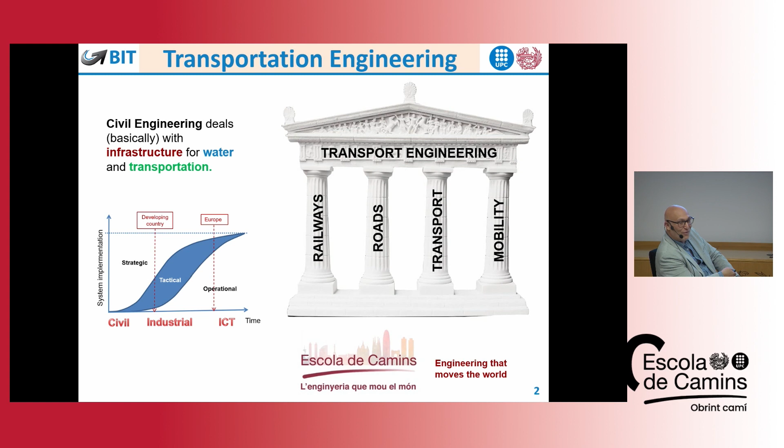As you can see with this lemma of the civil engineering school, they always use moving - it's always transportation related. Okay, let's talk a little bit about railways.

Railways. Well, basically the team is reduced, because they only had one subject at the beginning. I remember coming to the school on Saturday mornings - this professor, Andrés López Pita, was the only professor, one of the earliest professors we had in our school. He's been a professor since 1983, and he's retired now - retired some years ago. I remember coming on Saturday mornings, and the time was variable because he was coming from Madrid, and at that time the air shuttle Madrid-Barcelona was not very punctual.

Imagine the class was at 12 - well, today it was at 12, tomorrow at 12:45, depending on when he was arriving. Now people, the students, would leave. But at that time we were thinking, this guy is coming from Madrid just to give us one class of an hour or an hour and a half. It's a big sacrifice, a big personal sacrifice. It's not 15 minutes - he's spending a whole day just to teach us. So we were paying a lot of attention.

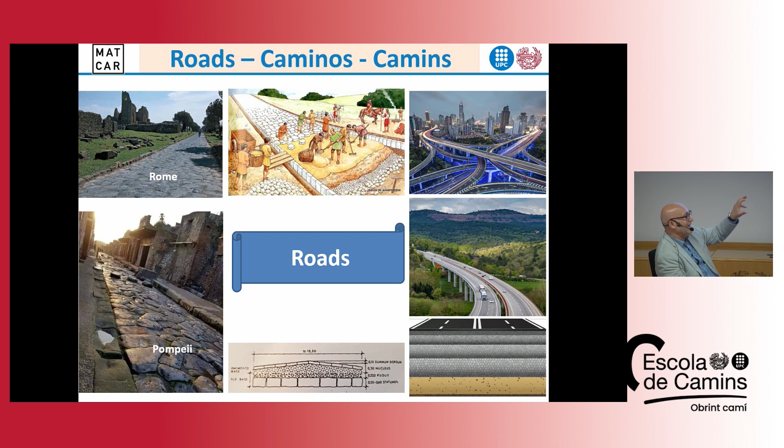Okay, roads. This was prepared by the roads team, but they're all watching an exam right now, so they can't be here. This was from the early days, the early years. Some people passed away already.

Joan Comte Guinovart, passed away, the first an expert about roads, and then this guy brought two young people, young engineers, José Vicente Solano and José María Alonso Viarge. I remember one of the subjects by José María Alonso Viarge. I didn't take it, but there was this kind of legend that the students talked about, about what this guy was talking about.

This is before computers. We are in the 70s, and this guy was talking about roads, the layout of roads as a swath, using differential varieties, Frenet trihedron and these kind of things, everything mathematical.

Then we had Juan Antonio Fernández del Campo, also passed away. He was coming from Madrid, and we used to call him the minister, because he was talking really like a minister, with a very nice suit. I remember the first class: well, the cities are not meant for cars. Something obvious, but he was making it really. And then Pablo Novell, also passed away. He was teaching road layout.

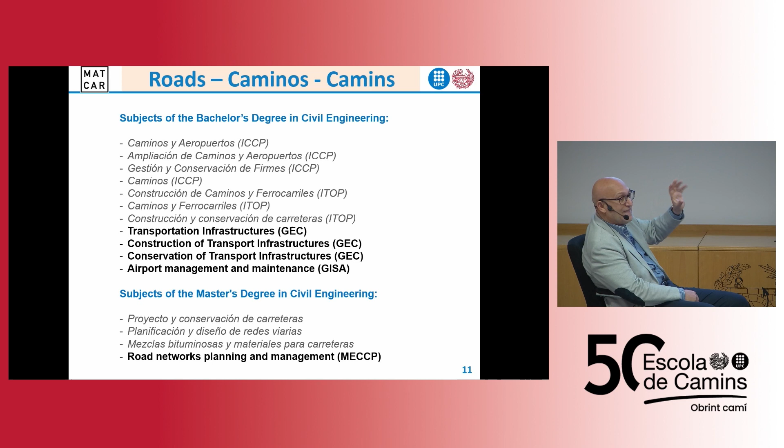They had several names, and the ones in bold are the current ones: transportation infrastructures, construction of transport infrastructures, conservation, airport management and maintenance, and road networks planning and management. Some of them are shared with the railway engineering guys.

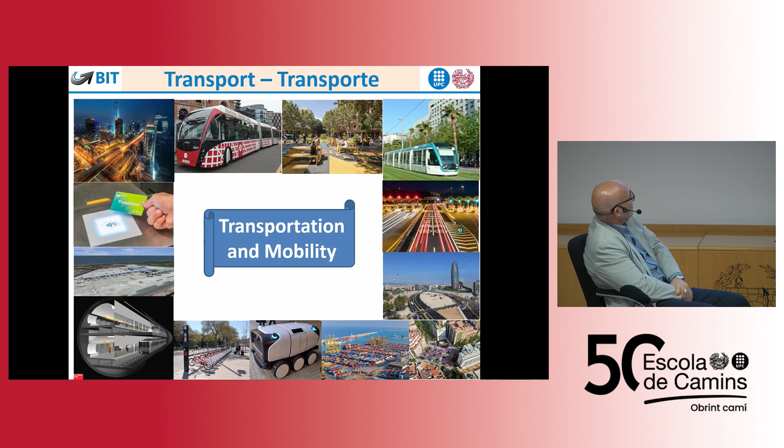And last is our team, the Barcelona Innovative Transportation Group. I'm going to talk about transportation and mobility, and pretty soon you will see that Jaume Barceló played a key role in this. The early days, late 70s. Professor Juan Domingo Cox, he died. But the first professor I had was Mateu Turró, the first professor with an international background. He got a master's in Michigan, at Ann Arbor, and then finished a PhD thesis here in Barcelona. But pretty soon he went to the European Investment Bank.

And then he called me and said, you need to finish the PhD thesis. That was in 1988, in May. When are you finishing? I said, at the end of the year. No, you need to finish before, because you need to be here at the beginning of September to teach the classes, because I'm going to the European Investment Bank. So you can imagine. And with me, I had the opportunity to get master's degrees and PhD at UC Berkeley, so we had some international standards about research, also the first publications in scientific journals in transportation.

Some years later, I was teaching not 20%, but 100% more than what I should teach, because I never had somebody helping. At the end, I said, I'm not going to teach the key subjects until we solve this. Of course, I talked to the director of the school, Antonio Aguado, first. And this was solved in one month. It went to the cloister of UPC, the rector said solve it. I had the promise that pretty soon we were going to hire somebody, and here comes Magín Campos, who came from Santander. Thank you, Magín, for this big leap.

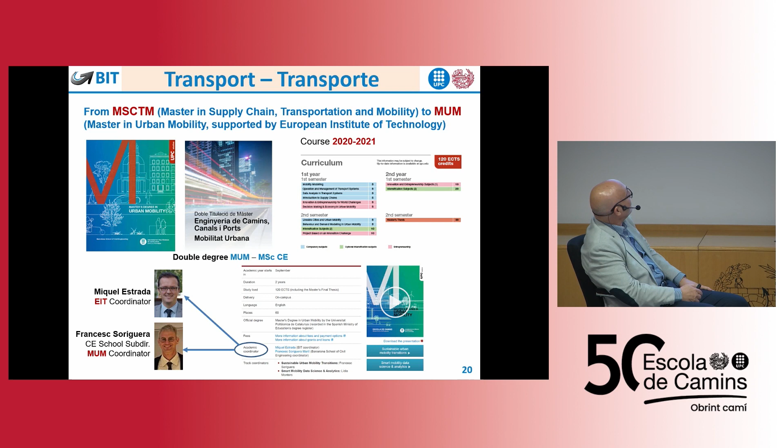Well, we have many subjects, from one in the 70s, economics and coordination of transportation. All the subjects in Spain that were not related to infrastructures had this name. And the people were related to railways, in Madrid and Valencia, everybody was related to railways. And then in the new plan of 1978, we had 2 subjects, but only 4 people of this specialty of transportation planning and transportation economics, and now we have a bunch of subjects.

This is our team today. We are these 7 full-time doctors, 2 professors, myself and Miquel Estrada, who is on a trip right now, but he became a full professor. Francesc Soriguera and Manel Grifoll are associate professors, but pretty soon they'll become full professors. And then José Magín Campos, Hugo Badia, and Margarita Martinez.

And then we have a bunch of collaborators, part-time, some of them with a PhD thesis, some of them have been PhD students of some of us, like Enrique Jiménez, Marcos Medina, and some of them are doing the PhD thesis right now, like Clement Lemardelais. Projects, lunches, we have a lot of fun.

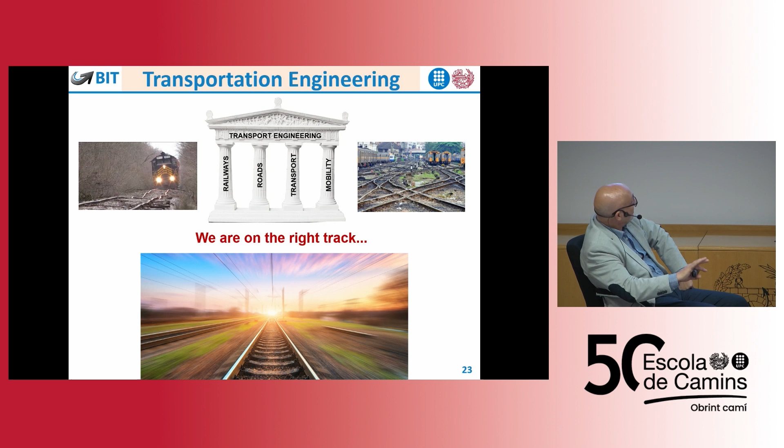And this is it. I think, I don't know, but I think as a group of all the transportation engineering, railways maybe need a little bit of this kind of renewal of people. We have the people, but they just started. Roads and transportation, I think we are on the right track. So thank you very much.

And now it's time to present Jaume Barceló. As I told you, he's a physicist. He's got a PhD in physical science. And he became professor of the Department of Statistics and Operations Research here at the Technical University of Catalonia. He is Professor Emeritus since 2014. He has been several things. He has been the scientific director of the transport and ICT projects at the InLab of the computer science faculty. He has been teaching in the computer science faculty and also in the mathematics and statistics faculty.

He became also the director of CARNET during a couple of years, 2015, 2016. And I remember he invited me to teach a lecture, and then I said, well, I don't think they're going to like it. And then he said, well, no, it's okay, it's okay. And after the lecture, they never invited me again.

He's author of more than 140 papers, and he got several awards, like the Narcís Monturiol Medal of the Regional Government of Catalonia, the Traffic Simulation Lifetime Achievement of the Transportation Research Board. He spent 3 years as a strategic advisor of the PTV group on transport models, but probably his best achievement with his team was to develop this reference micro-simulator AIMSUN.

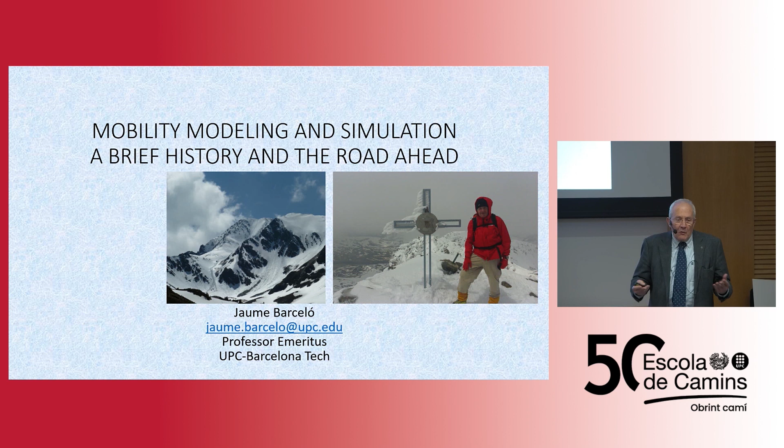But currently, there is a trend to present these achievements only in personal terms: I am who had conquered the mountain. But to explore an unknown territory, like the modeling territory was 50 years ago, we have to bear in mind the time perspective; it was just exploring something unknown. And this is not work that is done by a person, but by a team. It's only the joint effort of the team that allows you to reach the summit.

Yes, I'm going to talk about modeling, but before entering into the modeling details, let me make some reflections about what models are, the purpose of the model, and the use of models. First of all, I would like to highlight that a model is not the reality. The reality for me will be, in general, a system, and in this context, a transportation or traffic system. A model is only a formal representation, and I highlight this term formal, because it means we use very well-established rules and terms in a formal description of something. It's a formal representation of this reality.

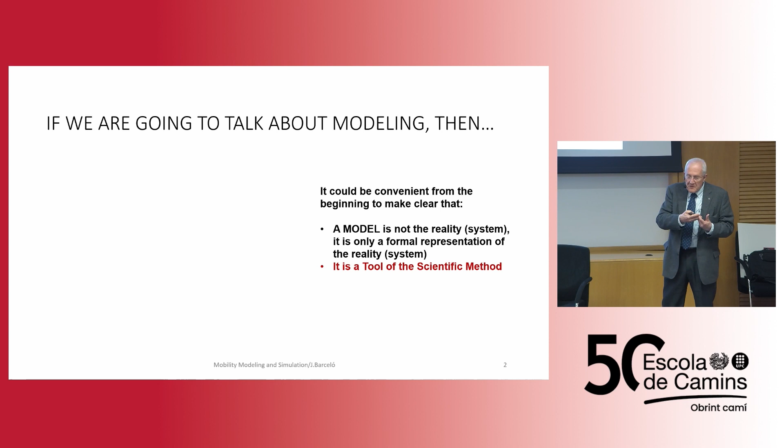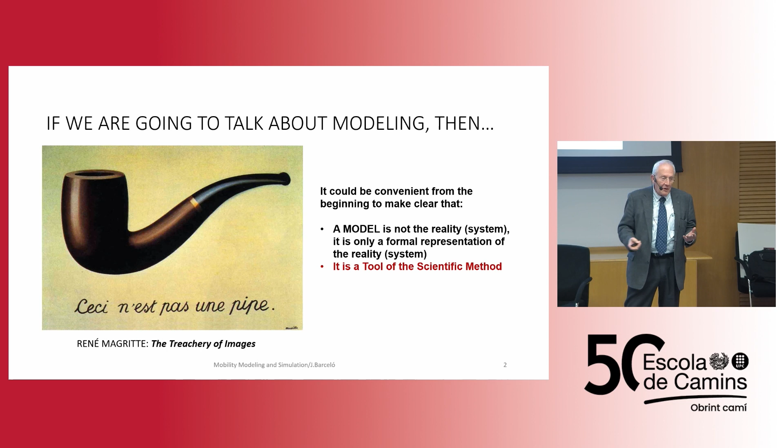And what I would like to highlight even more is that it is only a tool. A model is only a tool, but it's a tool that belongs to the core of what we know as the scientific method. So for me, transport modeling means applying this methodology to transport systems. And I like very much this picture from René Magritte, the surrealist painter, that reminds us that one thing is the representation of an object and another thing is the object. Please don't forget this.

Then a model can be defined as formally organizing what we know, or we think we know. I think this is very important. We think we know, because maybe we don't always have perfect knowledge of the system. About a system, and the purpose is to predict how the system might behave in the present, future, or past. Are we able to reconstruct the past? As well as how it might respond to external influence. In the case of traffic and transportation systems, what does external influence mean? It means a policy, an intervention, with the objective of making the system behave in a certain way.

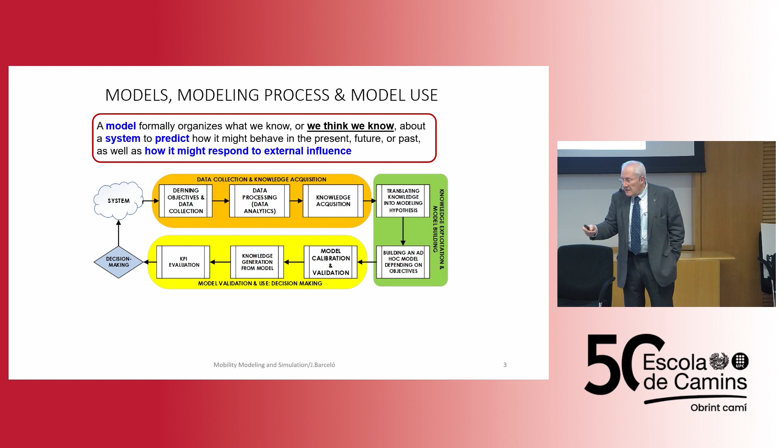Well, it has a very well-established methodology. I will not go through the details because otherwise, as some of my students have been reminding me today, I could spend more than one hour talking only about this slide. But what I would like to highlight very briefly is that it starts with acquiring knowledge of the system. And what is acquiring knowledge of the system? It is observing the system, measuring the system, processing this data, and extracting information from this data. The base hypothesis is that the data contain information about the phenomenon that generated them. So we try to get insight on this phenomenon through data processing and analysis. And this is the process of knowledge acquisition.

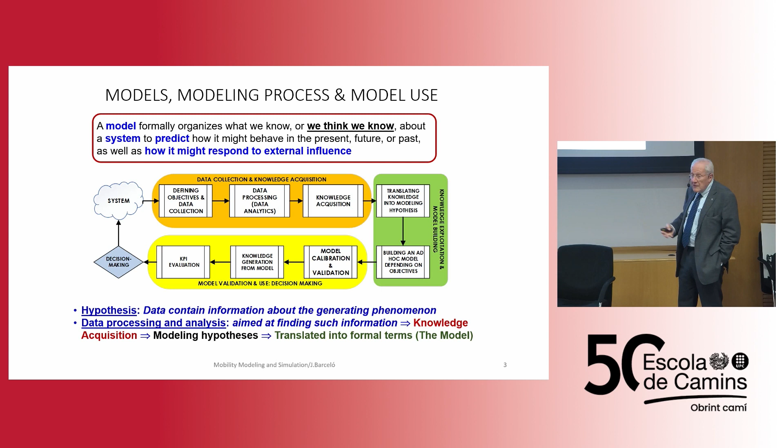This knowledge acquisition allows us to formulate modeling hypotheses. That means how we assume the system is working and evolving. And then the million-dollar question is whether or not we are able to translate this modeling hypothesis into the formal terms that we call the model.

But talking about models, this is a kind of recommendation after more than 40 years of working in modeling. For those working with models, please don't look for the holy grail of models. That means looking for the unique model that solves all your problems. For me, Marvin Minsky, one of the fathers of artificial intelligence, almost 70 years ago formulated the problem in very clear terms. It's what is known as Minsky's triad.

An object, M, is a model of a system, S, if it can provide valid answers to the questions of observers of the system. Consequence: there is not such a thing as the unique model; there are different models depending on the objectives of the observer, which are the questions that the observer tries to answer with the use of the model. But that means that if we are not looking for the Holy Grail, then we must be clear about which are the questions we try to answer.

Then we have to select the type of models. And then we have to make sure that this model is able of providing valid answers to the questions that we try to answer through the model. How this validity is established, I will say later on a few words about this. It's a combination of methods, criteria, and data.

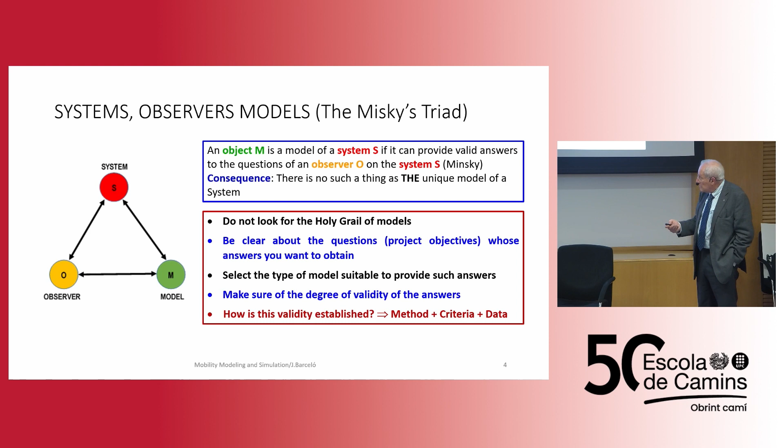Well, I think that traffic and transportation systems are a perfect example. We have a unique system, the traffic and transportation system. But we may have different objectives with our system analysis, from transport planning to traffic operations to something between. Then that means that the decisions that we are going to take on the system through the use of the model, that means the answers to the questions that we are looking for using the model, will be completely different

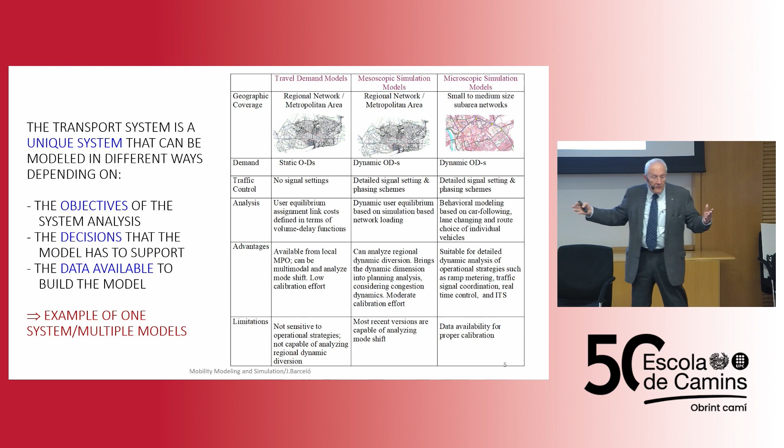in every case. And on the other hand, the data that we need, and very important, the data available, because quite frequently the limitation of modeling activities is just the availability of the data. We need the data that are not available. And this is for me the example of one system, multiple models. That is the perfect example of Minsky's triad.

But just to conclude this short introduction to modeling theory, as I have mentioned from the definition of the model, our main objective is to use the model to support decisions. Decisions can be made in many different ways. In 99.99% of the cases, it's just by intuitions. I believe that, I think that, I know that. And in the other cases, the rational decision is trying to be assisted by a decision support system.

And what's at the core of a decision support system is a model of the system, this formal representation of the system. But a caveat: the enemies of the models, that are a multitude, are very happy quoting George Box, one of the fathers of modern statistics, and because of that, one of the fathers of most of the models that we are currently using, when he said, all models are wrong.

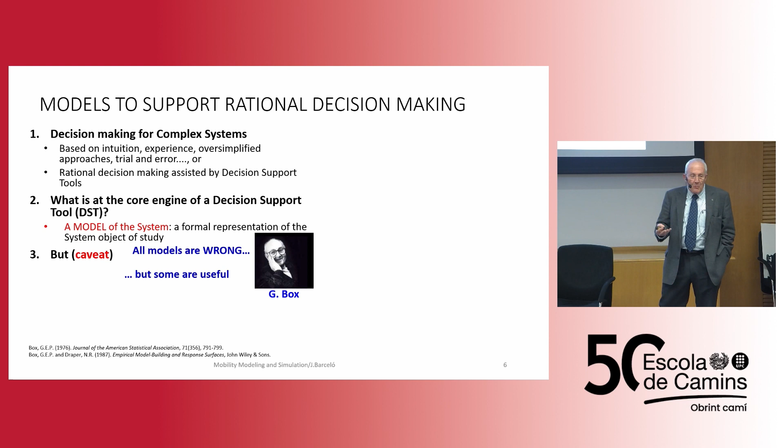Okay, this was in a paper. Well, incidentally, at the bottom of most of my slides are the references to the papers or the sources I have used to prepare them. Then he stated this in a paper. But what, in a very biased way, many people forget is to complete the quotation. And the quotation says, but some are useful, which is also stated in a book that was written along with Draper.

Then the one million question is: what makes a model useful? And it is the validation and calibration that provides a quantitative answer to this question, which finally means whether the model predictions faithfully represent the reality. How far is what I can observe in the reality from what the model does?

Okay, let's move into the objective of the talk. What was in the beginning? In the beginning were the microscopic models. How I became a transport modeler. It was very simple. In 1981, the Dirección General de Tráfico of the Spanish government contracted a consortium to develop a traffic management project on the National 2 in the section between the Barajas airport and the city.

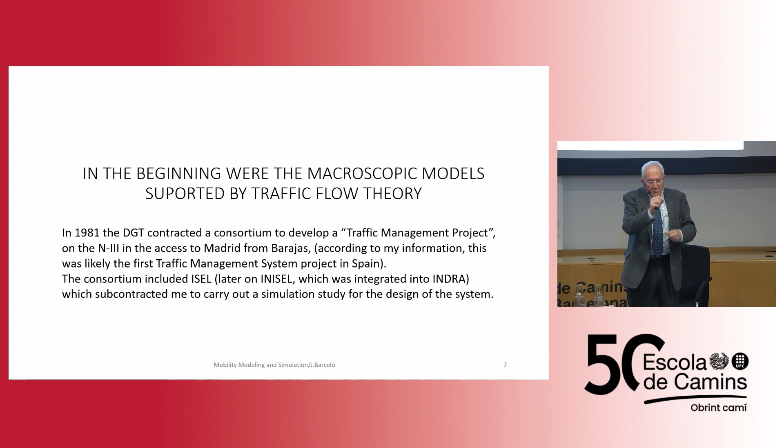And then it was Gardeta, do you remember him, who was in the panel who defined the project. And he was back from Berkeley a short time before that. And they said, okay, we need a model. So the word model, simulation model, was written in the pliego de condiciones, the conditions of the project.

And the project was awarded to a consortium of basically two companies. One company that was ISEL, and another company that was the company of the Ministry of Industry. Later on, these two companies merged into a unique company, and that was the origins of Indra. So there is a long story about this. Then I had been doing some simulation works for ISEL. And then ISEL contracted me to do this simulation work.

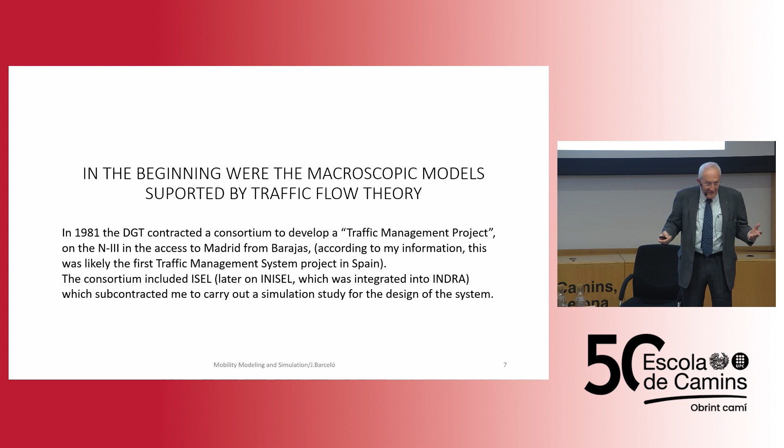Because I was expert in simulation, although I had never done any traffic simulation. So I had to learn. I started to learn, and then I discovered the first order models. And I thought, oh my God, coming from physics, this is very simple, this is very easy. These are just the hydrodynamic continuous equations of the physics that I had studied when I was studying physics. So I was very happy. Well, this is very easy, no problem at all.

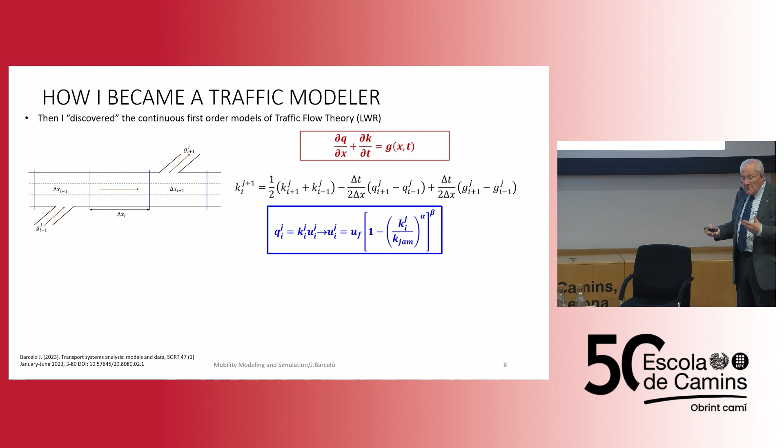Then I learned about how to solve the partial differential equations through the corresponding partitioning in discrete space and time intervals, the current mesh of the numerical methods for the partial differential equations. I discovered at that time, I say I discovered because I was learning, the fundamental diagram and how to use the fundamental diagram to solve this. Then I was curious, then I found that there was something else. It was the second order models.

Then I fell in love, I have to say intellectual love, with the Payne model, including these inertia and viscosity terms that were trying to anticipate the driver's reactions and things like that. And with all this, I coded myself in Fortran 4 at that time a small program just to implement a pilot project with the objective to prove to the Dirección General de Tráfico that, okay, modeling is a valid methodology and we are in conditions of building the right models to do that.

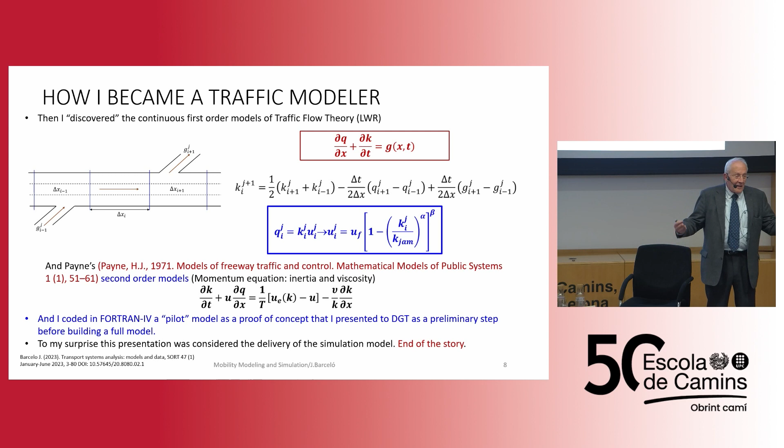Then I was asked to make the presentation at the Dirección General de Tráfico. And to my surprise, it happens that the Dirección General de Tráfico considered that my presentation had covered the objectives of the project. End of story. I never developed the full Payne model that was my original intention. I include here, just for documentation, a summary of the developments on these macroscopic models based on traffic flow theory at that time.

And I started a very nice collaboration with Panos Michalopoulos, who at that time was one of the gurus of the macroscopic models, and also with Markos Papageorgiou, that I assume some of you know. And obviously, later on, because I'm talking of the early 80s, it was 10 years later when Carlos Daganzo appeared with the cell transmission model that was an alternative approach to this type of modeling.

And then, well, some of you remember the big storm when Carlos Daganzo declared the requiem for the second-order models. But then there was a very strong response to that. And today, I think that this is solved in some sense. I will draw your attention to this KRONOS and METANET because we continue a relationship with them. And what I would like to highlight is another aspect. Well, so far I have been focusing my attention on the mathematical aspects of the modeling.

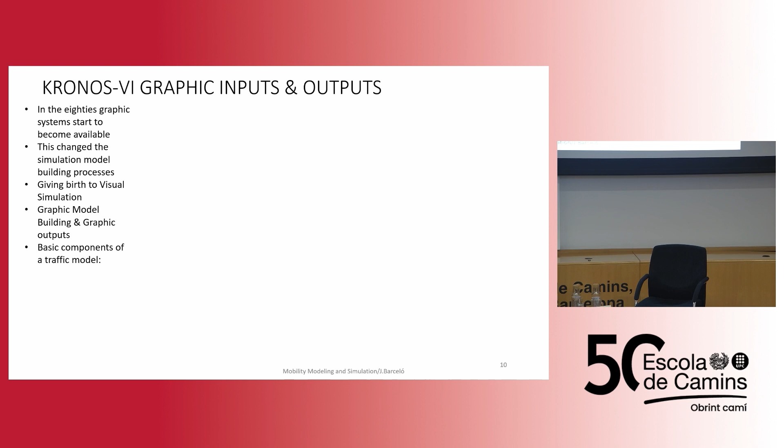But you have to implement the models. And you are implementing the models of a physical reality. And the physical reality, a motorway in this case, has a geometry. So that means that the model has, simplifying the situation, at least two main components: the physical model, the geometry of the model, and the mathematical model. And you have to put them together.

Then in the mid-80s appeared the first graphic systems. And then there was the possibility of thinking of developing tools to build the network, the road geometry. Well, this is what KRONOS 6 in the 90s, at the beginning of the 90s, did. They were trying to analyze which were the main geometric components of a motorway. And then they defined a graphic module for each one of them.

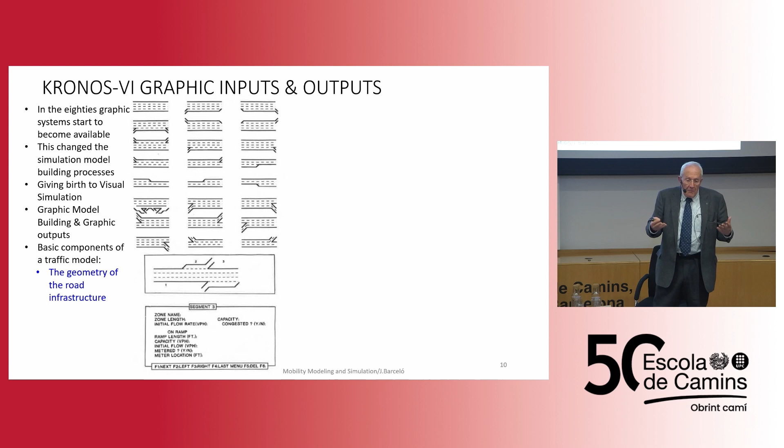So in that case, you had a screen, this is just the capture of one screen, and then you were selecting on the screen the different modules and then merging or joining the modules, and you had the model of the geometry. Then you had some dialogues to define the parameters of each one of the modules in terms of the flows, the turning proportions, and things like that. And then what you have to do is just to link this with the corresponding numerical equations that I showed in the previous one.

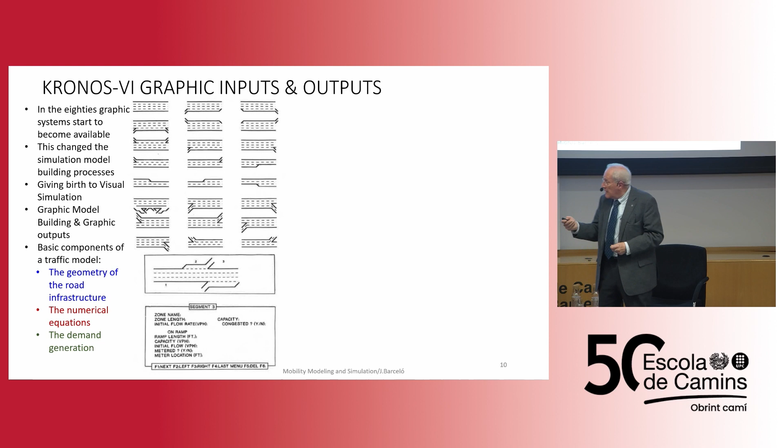After some time, I recall that my deception was that the Dirección General de Tráfico considered that my presentation was the project, not the development of the model. And then the municipality of Barcelona—I have to thank them because they were very contributive.

The municipality of Barcelona funded the development of AIMSUN. We put the seed capital to develop AIMSUN. It was with this project, co-funded by the municipality and this Comisión Asesora, that for a short period there was real money for research in Spain. After that, no more.

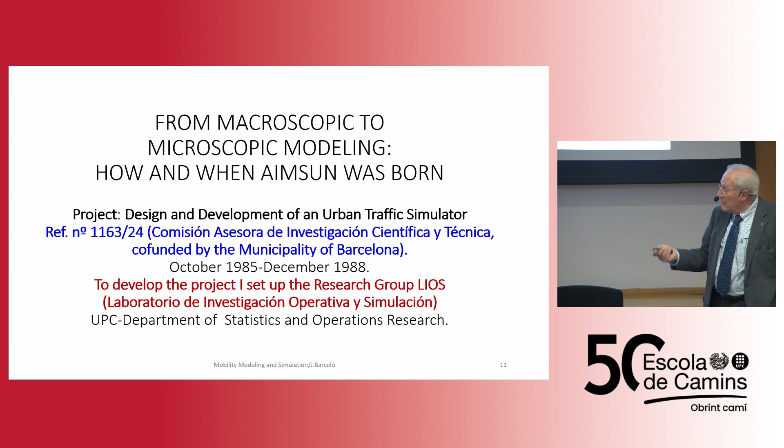But anyway, then we had to develop a project for the municipality. And this is the way in which I set up the research group LIOS, the Laboratorio de Investigación Operativa y Simulación, in our department.

Okay, but then immediately I realized that we were working in a completely different scenario. In a motorway, in a freeway, the only flow interruptions are due to congestion, the stop and go. But in a city, something different: you have crossings and traffic lights, and then you have interrupted flows. How can you properly deal with the interrupted flows?

A motorway is a linear structure, and vehicles enter through entry ramps and leave by exit ramps, but they don't follow specific paths. In a city's road network, you have origins, destinations, and paths from origins to destinations. From one origin to one destination you may have multiple paths. So how to deal with this?

That meant we had to change the simulation approach. The approach that I found could be the right one was what we call microscopic simulation. What does that mean? Finally, what we are doing is just trying to find a way to have a tool to analyze traffic flows.

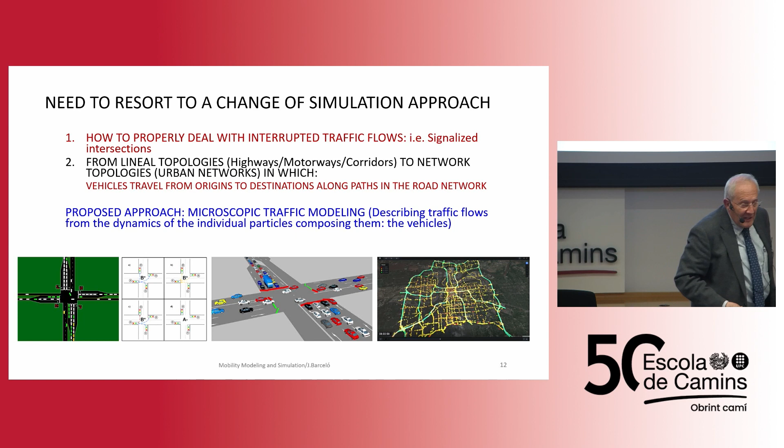And then I had to learn again something new. First, what was the state of the art at that time? We're talking about 1985. The only existing tool—well, maybe some universities or research groups had developed something—but the only one I found at that time was NetSim, developed by the Federal Highway Administration. The problem was that NetSim was very primitive, and the main issue was that building the geometry of the network was extremely painful.

You had to digitize the geometry and then input it manually. It was a nightmare. It wasn't until 1998, when the combination of NetSim and FreSim—a follow-up of Payne's model for motorways—became CORSIM, again sponsored by the Federal Highway Administration, that they included graphics for the first time. But 1998 was 13 years after we started our project, so we could not count on this.

Just an advertising note: from the very beginning, I realized that we needed to set up international connections because we had no reference in Spain.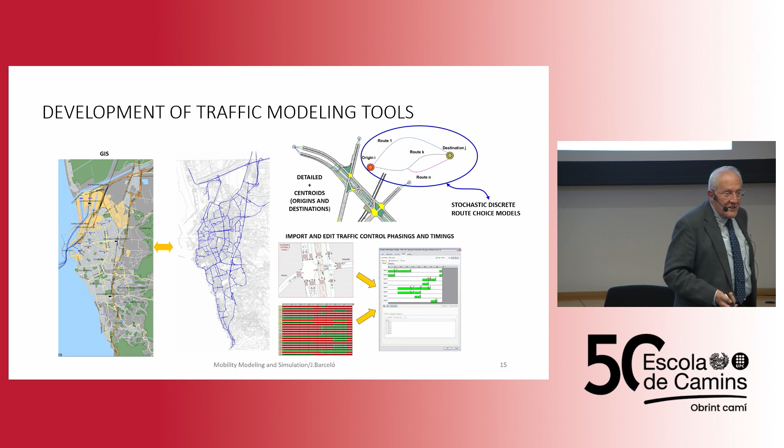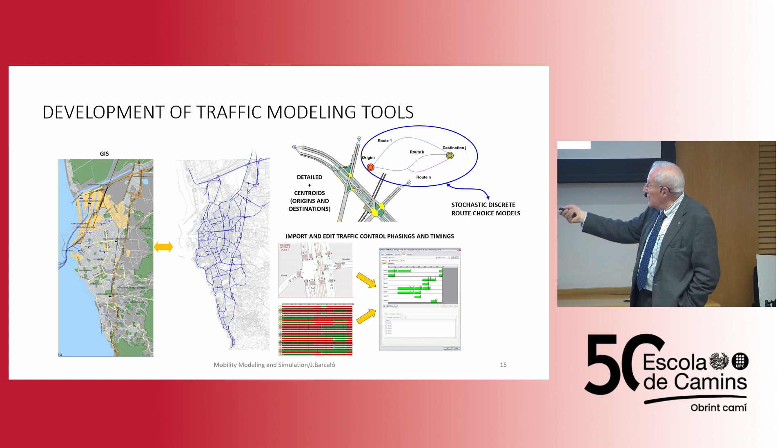Traffic control, in that case, was an input to the model. Incidentally, in the early years, when we went to the municipality to ask for a traffic control plan, they provided us with a bunch of papers, photocopies of documents, and then we had to enter them manually. Fortunately, things have changed substantially. Now, most of them have, for instance, the signal settings in Excel files, and then you can import the geometry, the allowed turnings, and the phasings automatically.

But a microscopic model is not only the geometry. You need some core models that are the engine of the simulation. Obviously, it would take me more than the time I am allowed to go through all the models, so let me just say a few words about car following. That is practically the most important of the models, the one describing how the vehicles move, the dynamics of the vehicles.

A short description of the bibliography: I discovered that people interested in car following had studied the problem, at least from a mathematical point of view, since long before we started our work. This slide can be considered the car following theory in a nutshell.

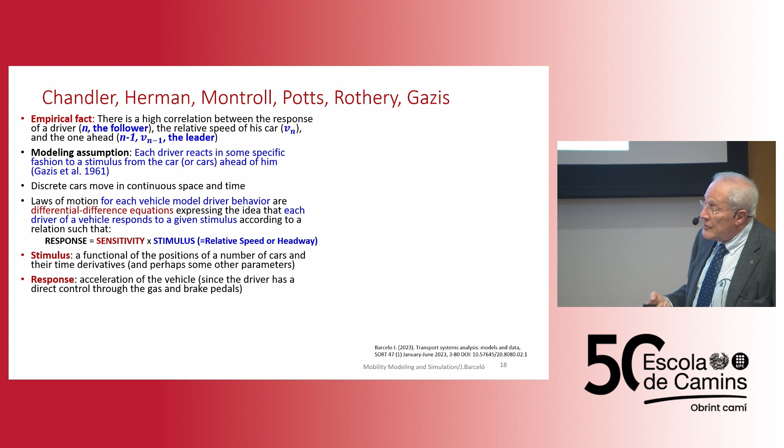The empirical facts were found by what was known as the General Motors team, headed by Robert Herman, Denos Gazis, Potts, Chandler, and they did some experiments. In these experiments, they found an empirical fact: there is a high correlation between the response of a driver and the relative speed of his car and the one ahead—the follower and the leader.

The modeling assumption is that each driver will react in some specific way to a stimulus. The question is, which is this stimulus? The discussion was that, taking into account that the laws of motion could be described in terms of systems of differential difference equations, the stimulus could be, for instance, the relative speed, the relative headway. You can define many concepts of a stimulus. Depending on which concept of stimulus you use, you get one kind of model or another.

And the sensitivity is about why drivers don't perceive the stimulus in the same way. When I was teaching at the master's program, I always gave the example that not every driver reacts like Fernando Alonso or Schumacher or, at this time, Verstappen or any of them. So that is what makes, for me, one of the most critical aspects in transport traffic modeling.

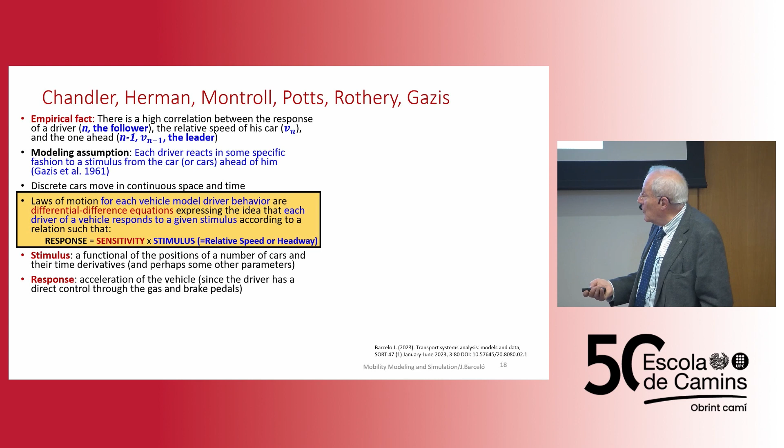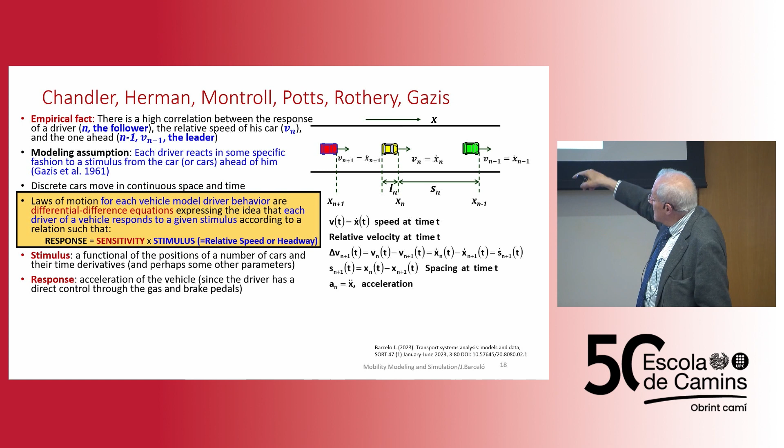So we have these vehicles, we have the speeds, the positions, we have the distances, the lengths of the vehicles, and then the different relationships with the definitions of the speed, the relative velocity between two vehicles, the spacing, the acceleration of the vehicle, and things like that. And from that, depending on how you define the stimulus, you can get families of car following models.

What I like very much is the general theory developed by a mathematician, Eddie Wilson, just 10 years ago, in which he puts all this into a general mathematical form, saying that any car following model can be described as a functional, depending on which type of functional you get one model. From a mathematical point of view it's quite useful because it allows you to analyze the stability of the model and things like that.

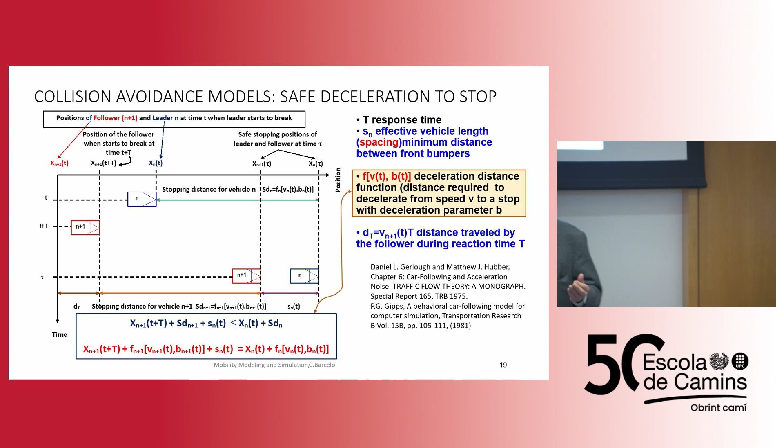But there is another possibility: assuming that people are not stupid. All models are based on hypotheses. Traffic models, as I mentioned a minute ago, assume some behavioral human hypothesis about human behavior. Assuming that humans are not stupid is a very strong hypothesis yet to be proved. Anyway, if we continue with that as a modeling hypothesis, we can ask the following question.

Let's assume this is the leader and this is the follower. Let's assume the leader decides to brake suddenly, to stop. This will be the distance, according to the laws of mechanics, that it takes the leader to come to a full stop. The follower will realize after a certain delay that the leader has started to stop, so the follower will try not to crash and will brake as much as possible. If it succeeds in not crashing, that means this will be the distance traveled until reaching, let's say, a safety distance from the lead vehicle.

If we accept this, and take into account that this is just a simple exercise in kinematics, we get to this functional, a function telling you the relative positions at every time, depending on the speeds and braking capabilities. It depends on a braking function, the function that determines, depending on the hypothesis you formulate about the deceleration, what this distance will be. You can assume constant deceleration, linear deceleration, exponential, and get in that way a family of models.

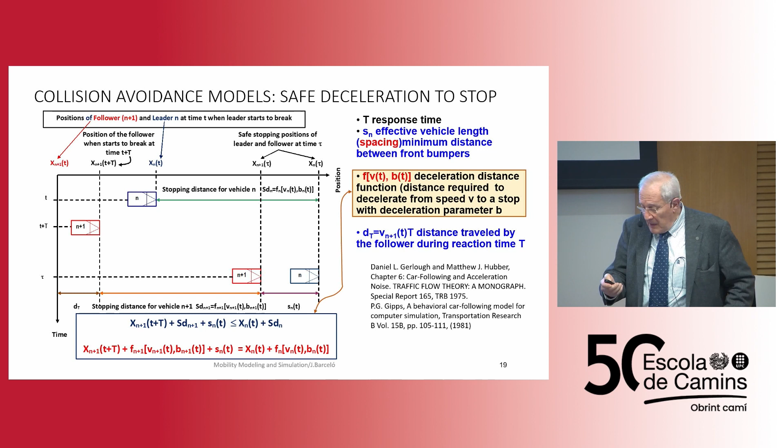One of these models is the Gipps model, and that was the model I decided to choose for AIMSUN. Why? Because after performing the typical analysis conducted with an Excel sheet, I found that the behavior in the relationships between velocities and distances was behaving more or less as expected, quite rational. When considering a section and taking into account the variation of acceleration, known as acceleration noise, it behaved as theoretically expected.

Similarly, when putting this in relationship with the reaction time, or simulating a leader-follower scenario, we could get the trajectories and the speed. So we found that Gipps was providing very acceptable behavior, and that was the way in which we decided to implement Gipps in the AIMSUN model.

Let me go shortly back to the origins of that. You may have heard of the methodology macro, meso, micro. Macro, in that case, will not be the continuous models I described before, but the long-term planning static assignment models. Meso, I will say a few words about mesoscopic models later on, and micro is the microscopic models I am describing.

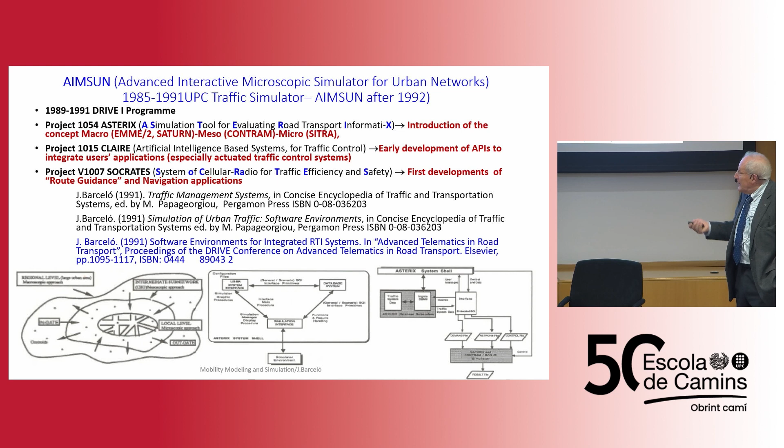Okay, more things. We go very quickly through this, but I would like to highlight something. When you come to the development of a software platform for modeling, you realize that it's far more than only the mathematical models. I have mentioned the developments for modeling the geometries of the systems, because we are modeling a physical system. But how do you put this together in an efficient way? If you want the macro to dialogue with the micro, how do you do that?

And for me the only message is that this represents the development of an integrated environment, and this could be done only with a multidisciplinary team. This is the team I showed in my preliminary slide. That means there was a lot of innovation in terms of the concepts of data structures. That is what makes, in some sense, AIMSUN so successful.

This is a list of the many different projects in which AIMSUN was developed. I will make very short comments about only 3 of them. The first is Petri, a project of the Parallel Computing Initiative of the European Union, whose coordinator was Matteo Valero, who at that time had CEPBA, the European Center for Parallelism of Barcelona, the precursor of the BSC. He invited me to join him in a team, and what we did was to parallelize AIMSUN.

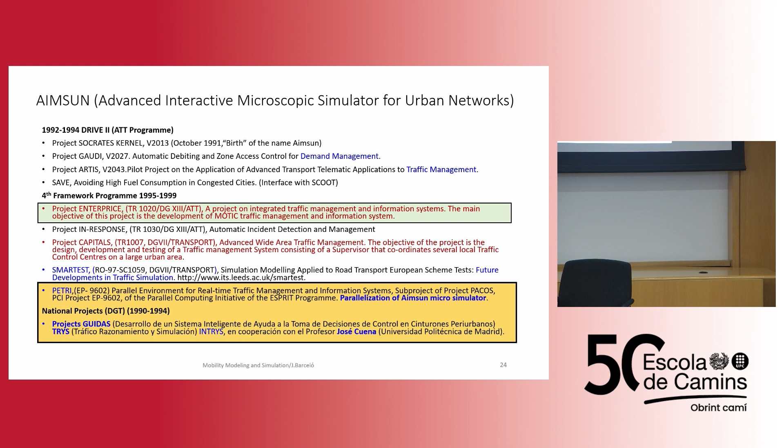When Frances made reference to the high computing performance of AIMSUN, these are the roots of that, and of a very successful collaboration with CEPBA.

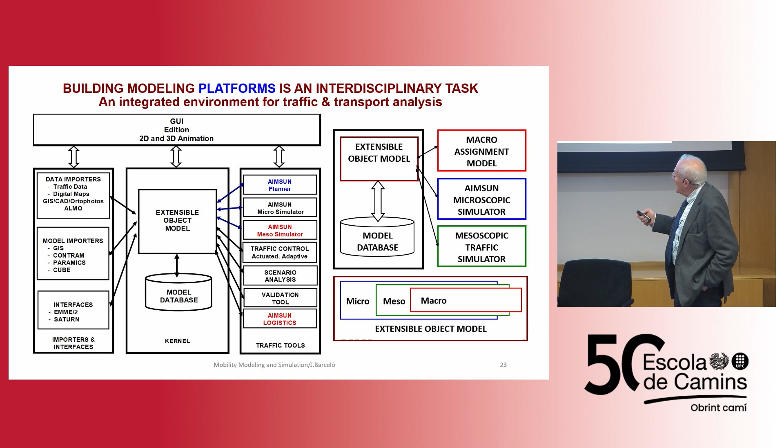GUIDAS were a set of projects funded by the Dirección General de Tráfico between 1990 and the Olympics. This allowed us, along with Professor José Cuena from the Technical University of Madrid, a civil engineer who later moved to computer science and became the leader of the applications of artificial intelligence to transportation, to combine artificial intelligence with microscopic simulation for traffic management.

And last but not least, Enterprise, which was first a European project, enabled us to develop the largest model we had developed so far: the model of the whole motorway network of Hessen in Germany. Later on, it became the basis for the development of AIMSUN Online, because they wanted traffic management in real time.

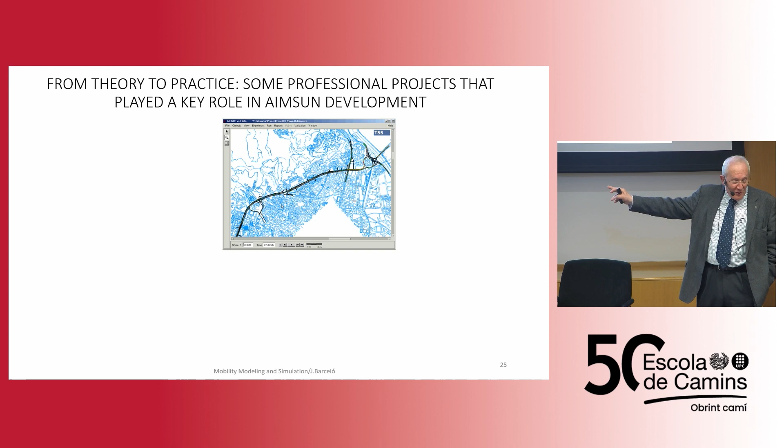Let me very briefly mention 3 particular projects that played an important role beyond the research and development projects. Maybe you will identify here the Ronda de Dalt and the Nus de Trinitat. There was a very strong controversy in Barcelona, risking that the Ronda de Dalt was not completed for the Olympics because of the differences. The municipality, because they had funded AIMSUN, wanted us to prove that their design was the right one. And unfortunately, what I was able to prove was something that Acebillo didn't like very much.

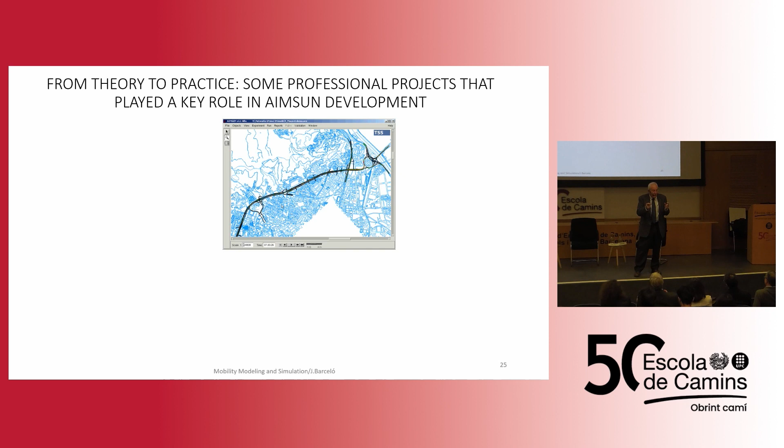I was proving that, continuing with this picture of the fluid, the traffic for a certain level of demand in the Ronda de Dalt was like a fluid in supercooling. It's like when you have water still liquid at minus 10. It can be, but it's a completely unstable system, and any small perturbation makes it freeze suddenly. So if we created any small perturbation in the traffic, the Ronda de Dalt became frozen, as usually happens in practice. So at least that was an empirical proof.

Anyway, I'll spare you Acebillo's reaction, which was not exactly very polite.

But anyway, the Mecca. This is Arafat. This is what the pilgrims do on the third day of the pilgrimage. This was the road, and here are the shrines in Arafat. The people spend the day praying, and at sunset, after the last prayer, they go back to Muzdalifah. That means between 2.5 and 3 million people start the trip almost at the same time, with a fleet at that time of around 60,000 vehicles, buses and trucks.

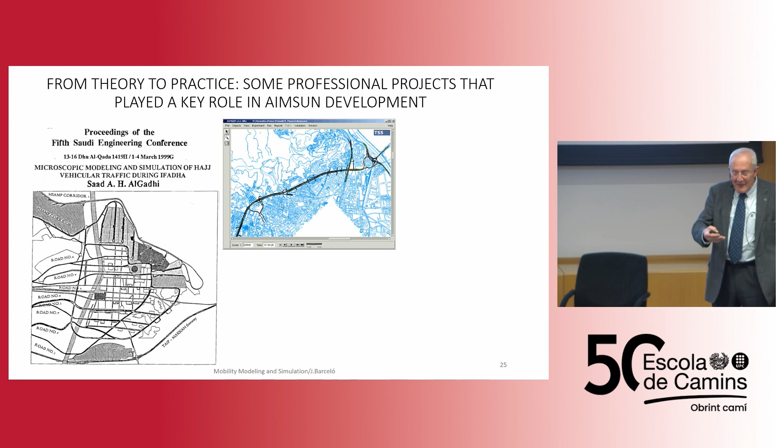You can imagine the collapse. And then we were contracted by a company and the King Saud University to develop a simulation model to try to find alternative solutions to that and things like that. I mentioned before the routes from origins to destination.

Well, this was a small but very interesting project in which this is the center of Dublin. This is the Liffey River. And then this is a critical part of the center of Dublin in which they wanted to test different traffic management schemes in order to find the best settings for the routes and the traffic lights. That was our test bed for the routing models.

Preston. Preston was a very interesting challenge. They were accusing us that AIMSUN was not able of validating the Preston model. And we found that the problem was that there was a discrepancy between the OD matrix that they were using, that was the typical OD matrix from transport planning fixed for an average day, while the traffic counts they were using were for a specific day.

So what happens, the traffic counts represented around 10% more trips than that of the average OD. So obviously AIMSUN was very good, but was not good enough to invent or generate from nothing the 10% of cars. But that was the starting point of a project in which I am still working, that of the estimation or adjustment of origin to destination matrices based on measurements. And finally, the one that I mentioned before, that is Hessen.

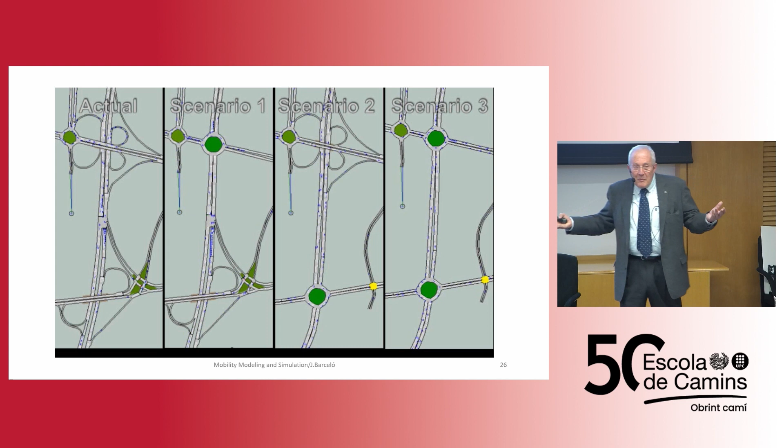This gives you a little overview, and then, well, most of you will perhaps be familiar with that, but maybe others not. Then you can see a typical use of AIMSUN. Incidentally, this corresponds to a project in the city of Vitoria. That was the actual structure. There were the 3 scenarios, and then what we were doing was just loading the model with exactly the same demand, and checking the performance of each one of the designs.

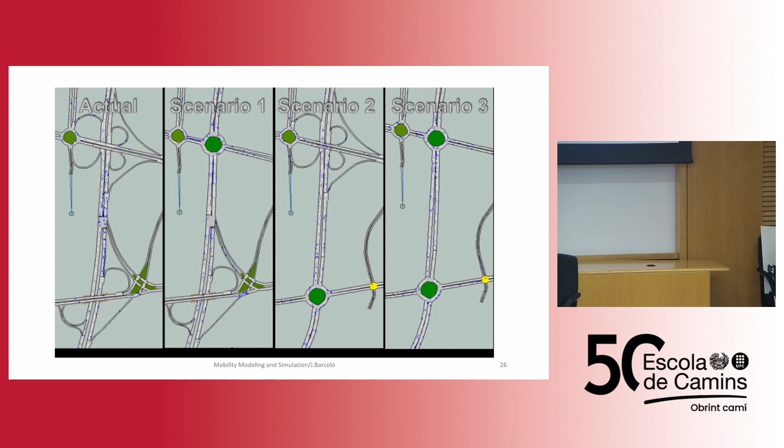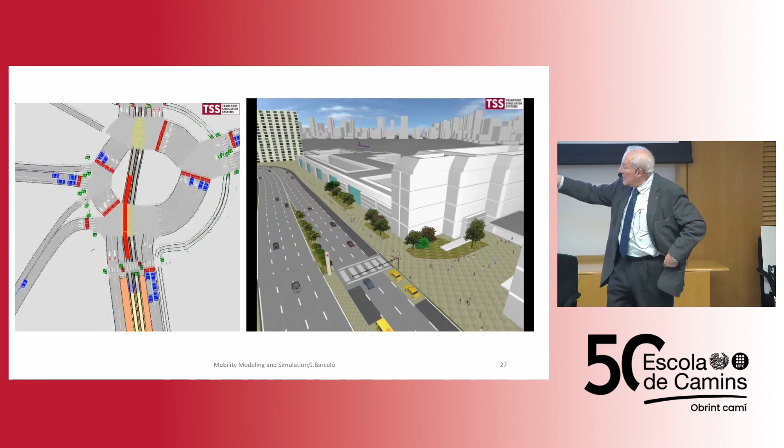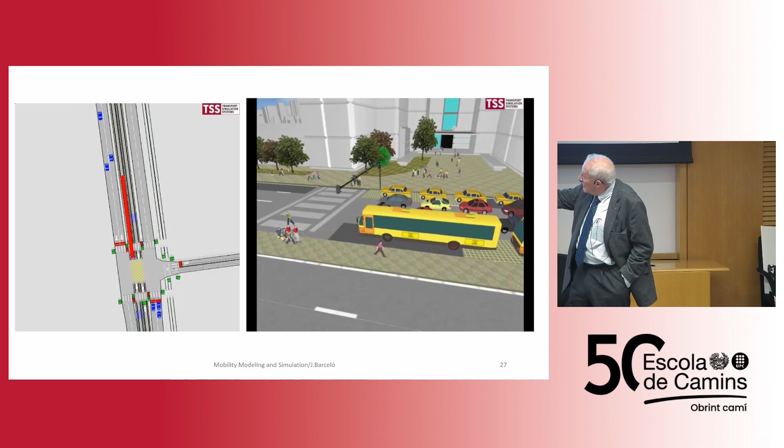Another possibility, okay. Well, this is particularly interesting. This is the project for the tramway in Paris for Boulevards des Maréchaux. The project was including, maybe you can see the situations, you have here the tramway stop, you have the tramway, you will see how the tramway gets to a traffic light and gets priority. You can see that there is green for the tramway, red for the others, so that was testing the performance of the system with a priority system for public transport.

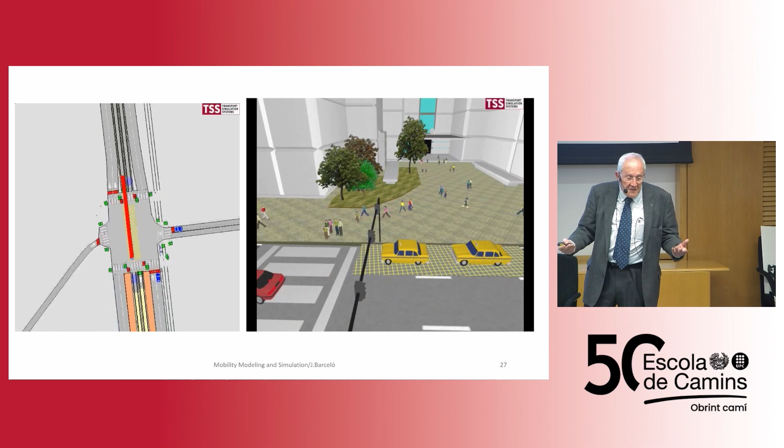Well, and this was, oh my God, I am only at the beginning. Well, I skip this, and then I will try to go very quickly.

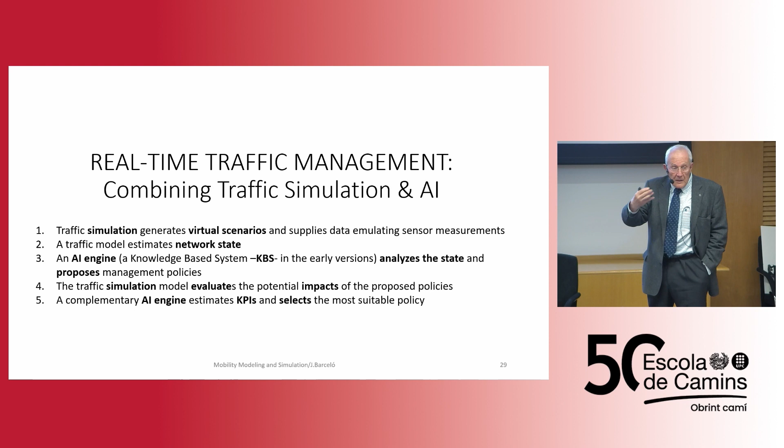I have mentioned several times the combinations of artificial intelligence and microscopic simulator. The scheme was very simple. The traffic simulation was used to generate a virtual scenario. Then a traffic model based on the emulation of the traffic measurements from this scenario estimates the state. And then an artificial intelligence, that at that time was initially based on a knowledge-based system, analyzes the state, evaluates the situation, and makes proposals. Then it communicates this to the traffic model, and the traffic model evaluates this.

Well, then there were two complementary approaches. One was an approach in which the initial traffic network was a priori split in areas, what in the terminology we used at that time were the problem areas. And then there was a system of agents devoted to the analysis of each one of them, and a supervisor. So it was inspired in a hierarchical control system, with the difference that the controllers in that case were artificial intelligence units.

Another possibility, exploiting the capabilities of this macro-micro approach, consisted in dynamically generating, once a problem was detected, a sub-network of the network around the problem, and then using AIMSUN in a similar way. That was the architecture. But dealing with large networks raises a problem: microscopic approaches are data greedy, and we did not always have all the data that we needed.

But for some of these applications, we realized that we didn't need the extreme details of the microscopic. What we required was a tool able to acceptably reconstruct the queue buildup and the spillbacks of the queues. And that was the idea of mesoscopic modeling. You can see that the one responsible for that is seated down there, Maripaz.

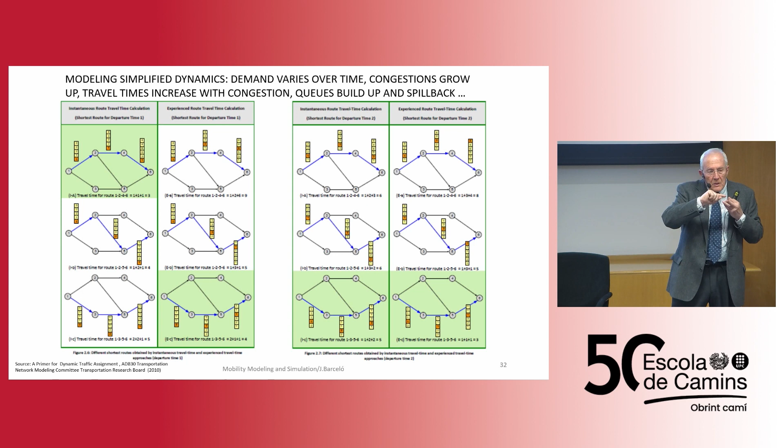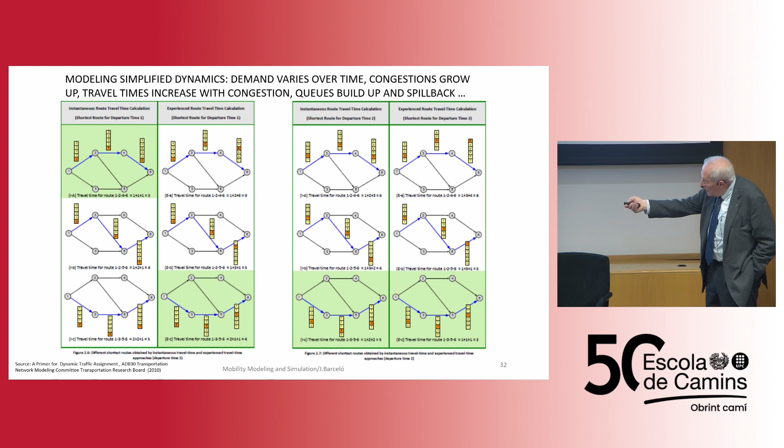And then, very briefly, the basic idea is the following: when you assign the traffic onto the network, a very rough approach assumes that all the travel times are known in advance. And what happens is that the travel times depend on when the vehicle gets from one link to the next, and this is dynamically changing. Well, you have here a very nice document that represents this.

This was the way in which we come to a dynamic traffic assignment based on simulation, in which the system is just iterating between a route choice and path flow assignment. It determines at each time period the amount of vehicles that are going into each path. And then a dynamic network loading. It could be many approaches. The one that she used in her PhD thesis was based on a simplified car following model.

But the car following model was built in such a way that at least it was able of reproducing the triangular fundamental diagram. So that means that the parameters of the fundamental diagram are related to the parameters of the mesoscopic model. With that, we were in conditions of completing this methodology of moving from a very large network, selecting a subnetwork, and this was simulated as a static traffic assignment, this as a mesoscopic assignment, and this getting back to the details with the microscopic assignment.

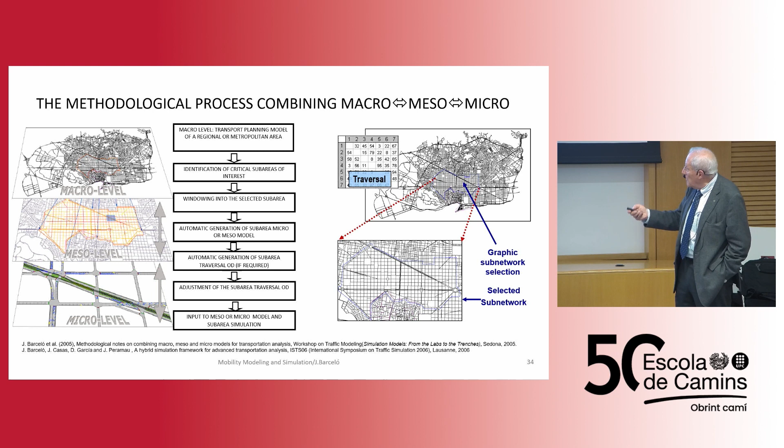But this opened the door to many other possibilities, that of enhancing the traffic management systems, in combination with the macroscopic fundamental diagram idea, the possibility of a wide area control, in which you were using this in order to control a gate in, gate out, in order to keep a certain number of vehicles before congestion in the area.

But then in that case, you are simulating the large area with a mesoscopic model, and then the interior area with a microscopic one. But this is in a consistent way, because you are dealing here with individual vehicles and you are dealing here with individual vehicles. The vehicle here, when it crosses the gate, is the same vehicle. You are not changing the vehicle.

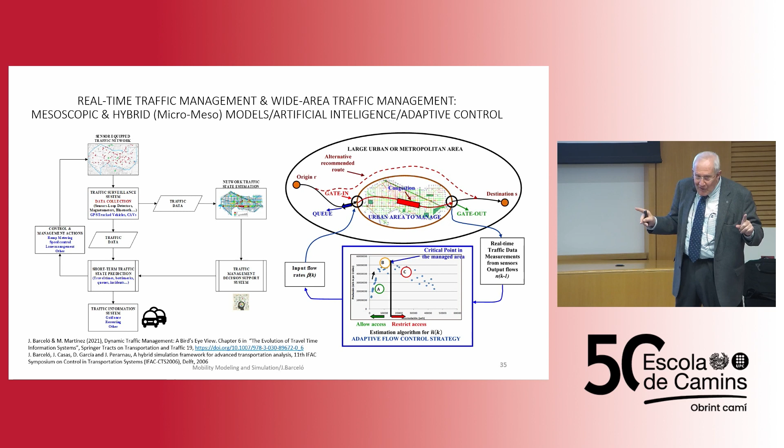Okay, then to finish, the road ahead. Well, the road ahead is exactly something like asking the crystal ball. And I like very much, since I read this book by Roy Scranton, Learning to Die in the Anthropocene, what he says: throughout history, civilizations have walked towards disaster because we humans are programmed to believe that tomorrow will be similar to today. Okay, what's possible? Now we have access to an unprecedented amount of new data through the ICT technologies.

And this is allowing us to refine this conceptual architecture of traffic control systems. But even more, we can improve the role of the artificial intelligence models, because we can now use machine learning processes to better identify the short-term patterns in certain parts of the network. But anyway, my claim is that it is not the question of one or the other. It's not a disjunctive or. It's an inclusive. It's both. We need both.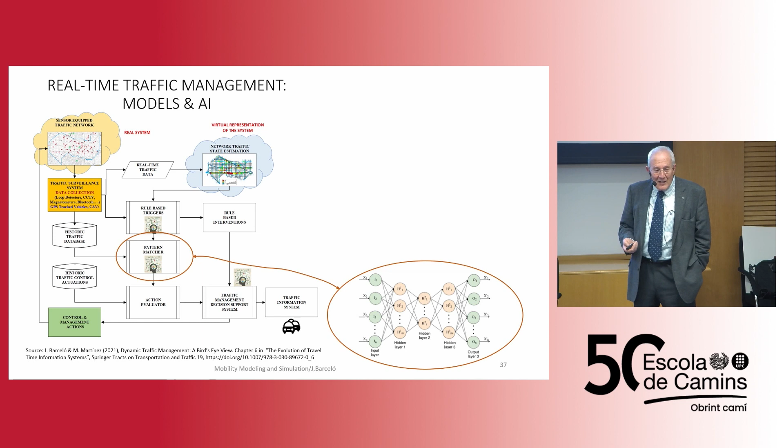I will draw your attention to the following. We have here the network, the physical network, the real network with the sensors. And we have here the model that is the virtual representation of the network with the representation of the sensors. And both are dialoguing. Oh my God, this is what now is called the digital twins. Then I came to discover that, like Molière's bourgeois, I was speaking in prose without knowing I was doing it. Well, this is a list of the many previous projects in which we had used this type of approach, but we have never called them a digital twin.

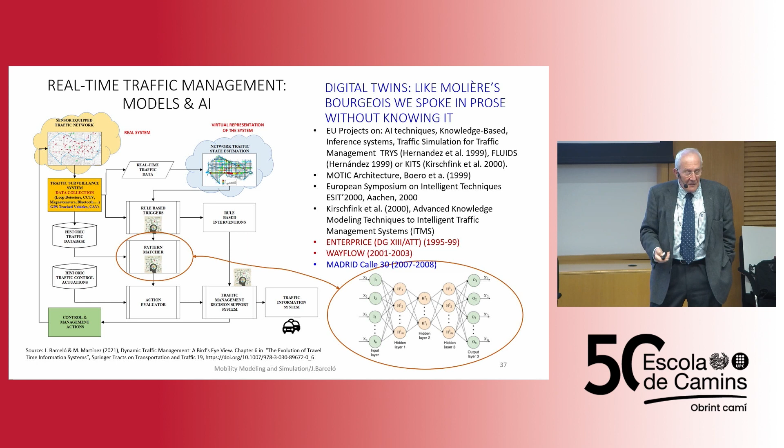Something else, because we have access to this unprecedented huge amount of data: what happens when I am tracking a vehicle with GPS equipment? I can get the waypoints, which provide me the location in terms of latitude, longitude, and time tags. Then I can process them. It's not a simple process. And here is where all the data analytic techniques come to work. That means that I need to go through a map matching process.

From this map matching process, I can get the data that allow me to compute either the link travel times, or for instance, the percentage of use between origin and destination at each time period of each of the paths. So I can get a very complete description of the time-dependent mobility patterns. And even more, the key component of most analytical models is what we call the assignment matrix.

With the assignment matrix, if we have various origins, various destinations, there may be different paths that share a link. Then the key component for most of these analytical models is the proportion of trips from origin I to destination J, departing in period R and arriving at the link. When do they arrive at the link? At what time period? And this gives me a full dynamic description, and this is the beginning of what we could call data-driven modeling.

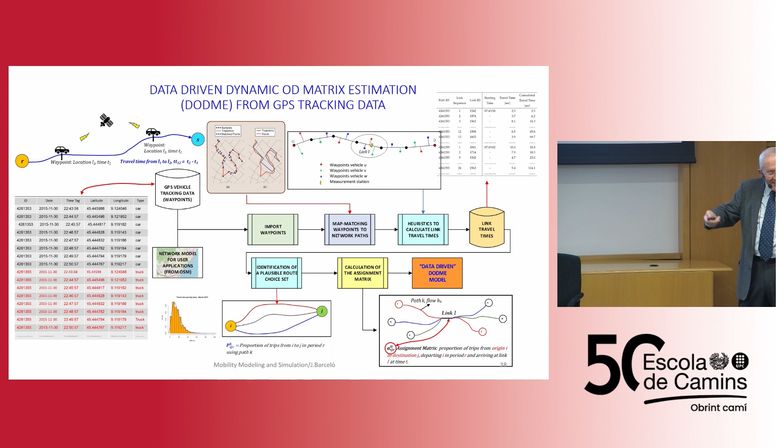I presented this, although we did that, because it's not finished. There are plenty of alternatives to do that. Even more, no one unique source of data will provide all the information we need. What does that mean? It means that we need to fuse the data.

This will be an example of fusing mobile phone data with the socioeconomic data from census tracts, from the conventional traffic measurements, from the GPS, the data I presented before, tracking the vehicles, and then putting them together. It's like a cocktail, and then you get something that could be useful. Well, I have included here a set of papers that are accessible in which this is described in great detail.

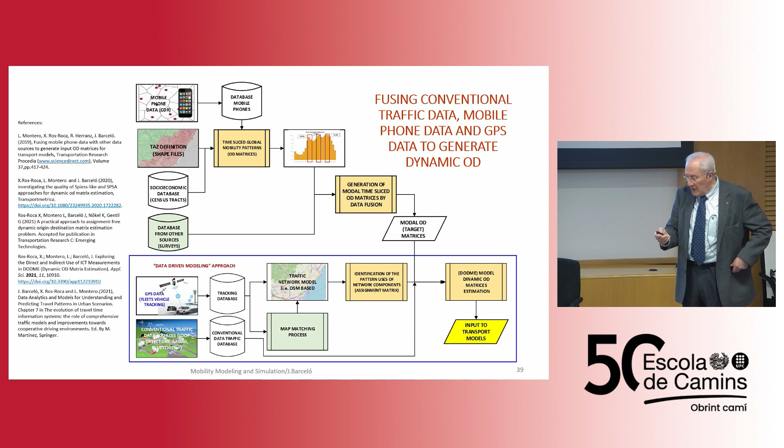But, and I will try to conclude in a couple of minutes, looking into the future, I enter now into a very personal point of view. And as personal, I am open to discuss. I don't think I have the truth that has been given to me in Sinai by a Lord in some stones. We can look at the future from two points of view.

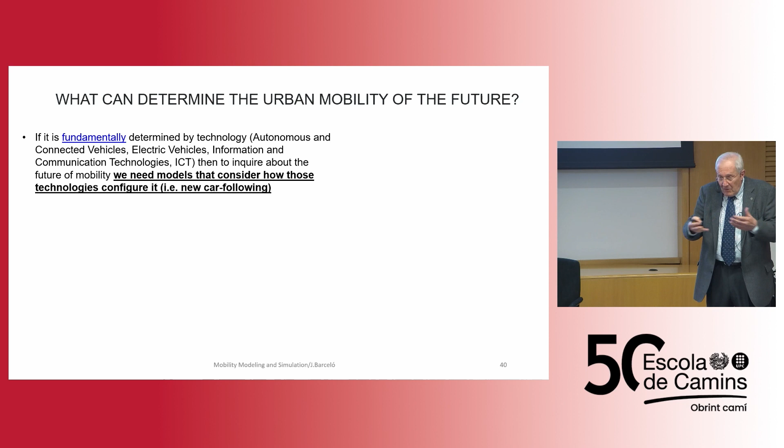One is the new religion, the technolatry. And that means that technology will take us to paradise, that connected vehicles, electric vehicles, information and communication technology will be our path to paradise. Then in that case, if we believe that, obviously the new models will be all the models. For instance, rethink the car following model, rethink many things.

But my point of view is that this represents assuming that we will do the same things always in the same way, only using a different mode. So we change the conventional vehicle for the electric vehicle or the connected vehicle. But we are still going from A to B in the same way. There is, and I insist that this is very personal, another view.

It is thinking that mobility, and because of that, the distinction between mobility and transportation, depends on many other aspects that are not purely the technology. It depends on social factors, on the structure of the city, on the distribution of the activities in the city, and things like that. So maybe then the solution is to think of doing different things, but still use the technology to do that. For instance, the 15-minute cities and things like that could be an example of that.

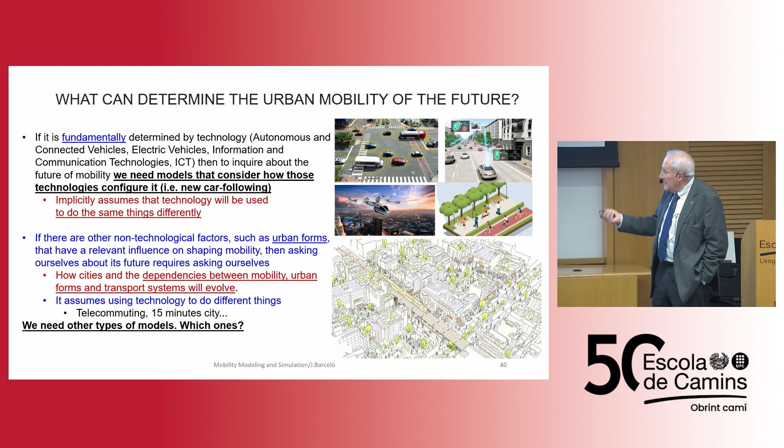Okay, then in that case, we need other types of models. Which models? This is one of the slides I could spend one hour talking about. I will only say a few words, and I hope I will still be able to convey the message. Finally, what is essential is the accessibility to the activities. Doing the activities, realizing the activities is what we need, is what makes sense. And if we need to travel, it's because there is a spatial separation in the areas of the activities.

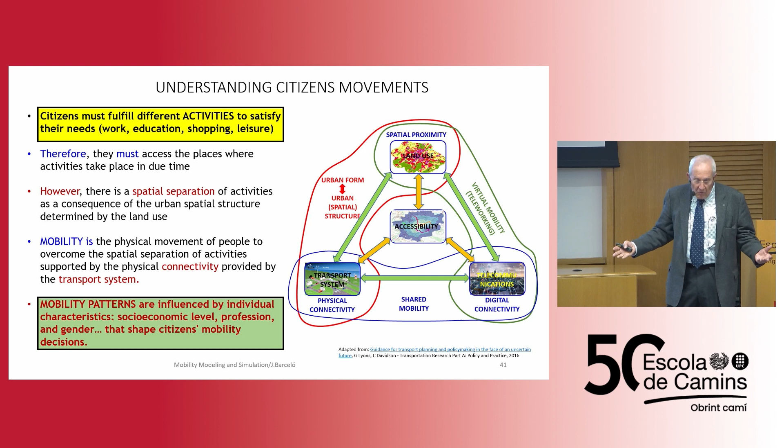So accessibility is at the center, and then we have the other factors: the land use, on which the spatial proximity depends, the transport system, that provides the physical connectivity, but all these mobility patterns are also influenced by many other factors that are not technological factors. This is why a different way of looking at this is just looking at the activities, the sequence of activities that people do every day. Leave home, take the children to school, then from there go to work, then maybe to the supermarket. So this sequence of activities is what makes sense.

But dealing with this means, and I insist that this could be a very provocative proposal, but I think I am in a position to be provocative, that we need to change our minds. So far, we are using conventional reductionist approaches. This is the typical mechanistic approach. I split my system into components and I analyze each one of the components independently. I use the parable of the blind men visiting the elephant.

My point is that maybe it's time to change our minds. And that means to think about the complexity of the systems. Cities are complex systems, and complex systems are systems composed of a large number of components that interact.

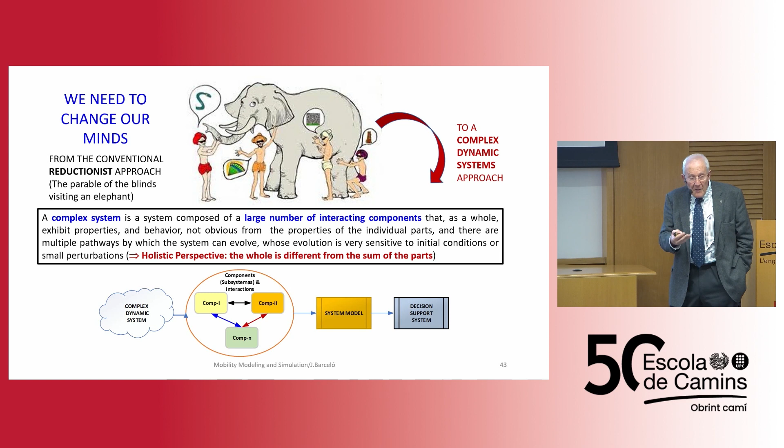And the interactions are as important as the components and the final behavior of the system. And what happens with this type of complex systems? That the behaviors are quite frequently counterintuitive, because I push the button here, but the reaction could be there. I fix the local problem, but I create another problem. So what does that mean? That means thinking of the cities as a large, complex system, and the transport models as one of the complex components of a complex system.

Let me give you an example. I have included here the energy as one of the components. It makes sense to think of the electrification of mobility. Thinking only of the vehicles and the charging points, what about the grid network? Is it able to support this? If you go to Barcelona, you will see that we don't have the network to support this.

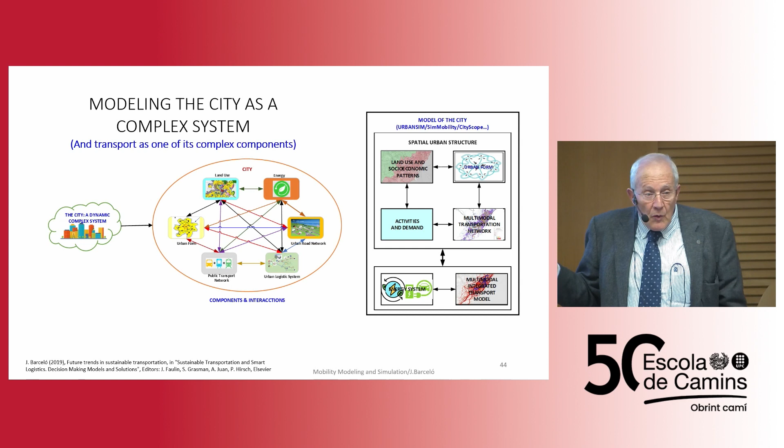And what about the generation of the energy that we need to supply? Not only the energy, even something that is more interesting, the power. Because it's the energy that we must supply in a given period of time. We have a given period of time to supply this energy, not forever. Okay, so because of that, I think that a way of dealing with this is that we have the tools. What happens is they are, so far, not commercial tools.

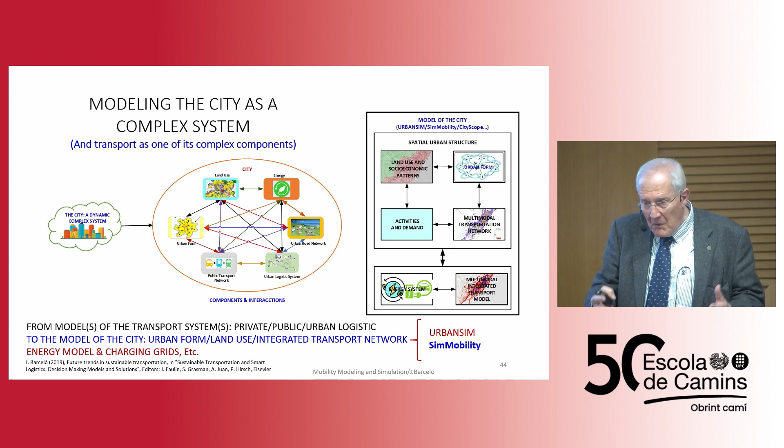But for instance, well, I will forget a little bit about UrbanSim, but I don't know why, the Berkeley project is no longer supported. Waddell retired, and then after his retirement, apparently it came down. But SimMobility is the magic project in Singapore, with the MIT group Moshe Ben-Akiva is leading. And what they are doing is building models that integrate all the components and the relationships among these components.

So to conclude, I like very much this sentence of Antoine de Saint-Exupéry, Citadelle: "pour ce qui est de l'avenir, il ne s'agit pas de le prévoir, mais de le rendre possible." It's what I would like, to make the future possible. And then what is clear for me is that the road ahead, if I have to give some recommendations, will be to think of which are the cities we need to survive in the Anthropocene.

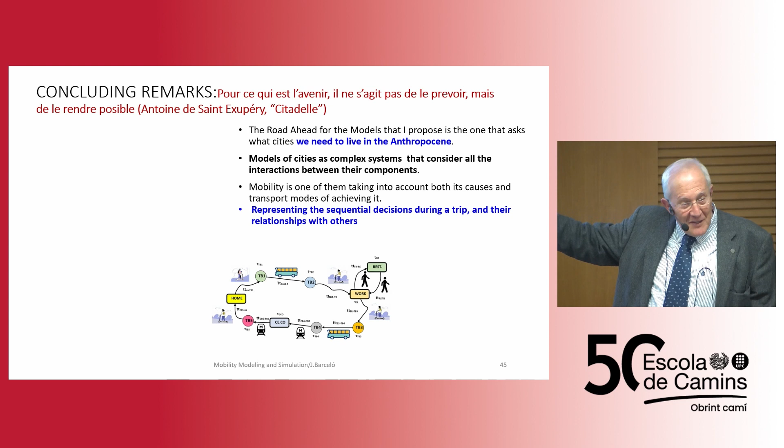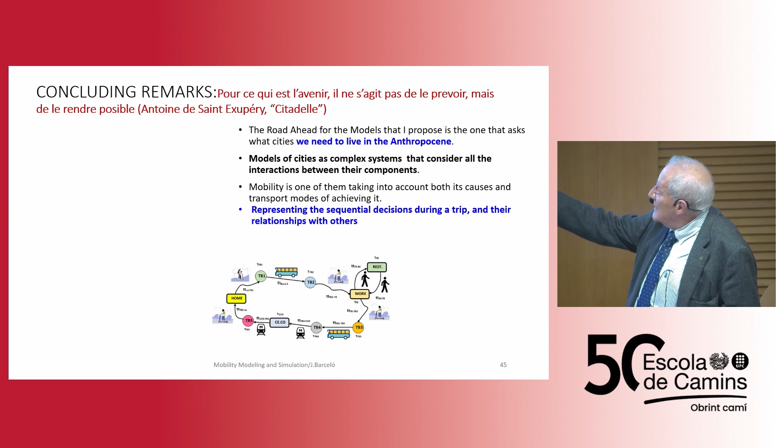Incidentally, this is borrowed from a group of people that is thinking of that. There are very nice publications about the cities in the Anthropocene. That means model the cities as complex systems, taking mobility as one of the components, and look for the integration. Then take into account this activity-based approach as a way of representing the sequential activity.

Also, something that I have always found very curious is that in our transportation models we are not including the urban distribution models. While if you do this type of approach, then this could be a type of activities and a chain of sequences of activities, and you can include it in a natural way. And you have this type of approach.

Okay, let's try to leave in 10 or 12 minutes, but I think we can take a couple of questions or three, if you guys want, of course. Any question from the audience? Everything is clear. So either they agree or they so deeply disagree that they think it makes no sense to disagree. Well, if there are, yeah, Francesc Magrinyà.